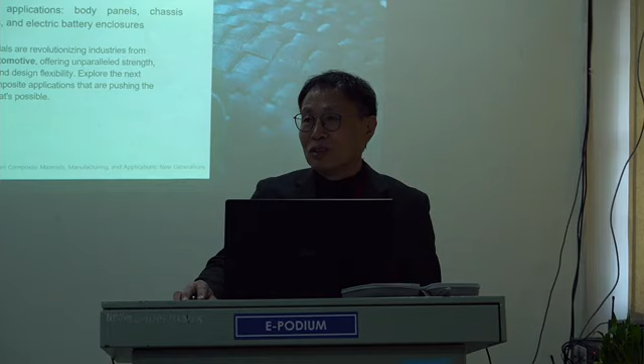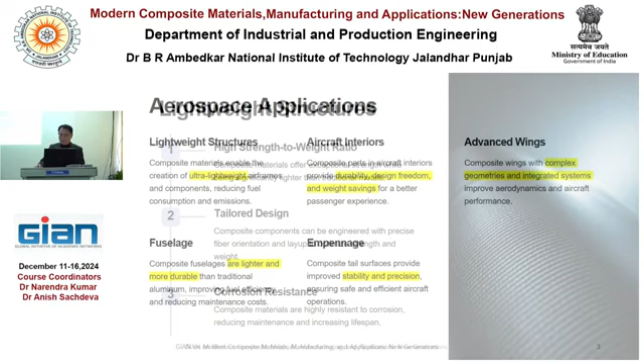And in order to have the best design satisfaction, we can design its anisotropy as we wish. So we can remove stiffening along the directions where we don't want high stiffness or high strength. So those three different advantages are basic keywords for all kinds of composite materials.

So it can be summarized like this: offering unparalleled strength, weight saving, and design flexibility. It's based on those three characteristics. So here we'll explore next generation composite applications.

We start from aerospace application because it is usually the first use of advanced technologies, not just in the material sector, but all very sophisticated, newly developed ones. If they are very reliable, then regardless of cost, new generation technologies can be used for aerospace. That's why advanced technologies can be found in aerospace applications first.

That doesn't mean automotive application is less technical or less advanced compared to aerospace. I think the extension to automotive application after aerospace is more meaningful, because in aerospace, mass production is not considered, since the number of required structures is limited. But in the automotive case, mass production must be engaged.

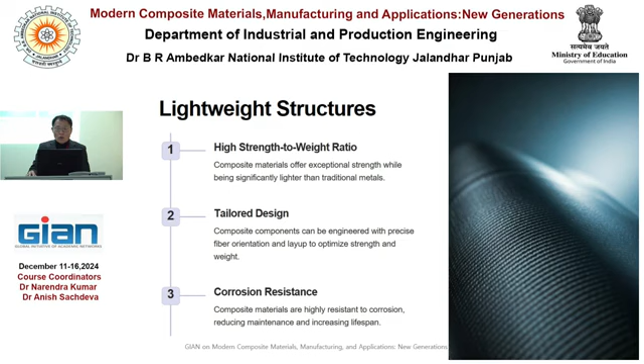This is a sample of composite materials currently used in aerospace application. This is secondary structure: seating, storage parts inside the cabin, and cabin interiors. All of those use composite materials these days.

And for advanced wings, the important points are aerodynamic efficiency, integrated system, and structural integrity. Of course the wing requires a complex optimized shape, so the manufacturing process must be considered to make this possible. And for the integrated system, composite wings allow seamless integration of control surfaces, sensors, and other systems.

And for structural integrity, it is very easy to embody strength and durability for the aircraft wing, improving safety and reliability.

Whereas for automotive application: composite material application for airplanes or space shuttles is a long story already, going back to the 1950s and mostly developed in the 1960s. But when it comes to automotives, it maybe just goes back to the 1990s.

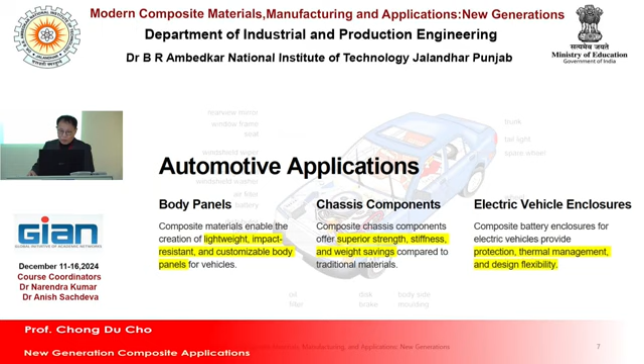And to take more space for battery cells, the case design shape must be flexible. About the body panel: lightweight, impact resistance, and customization. As we saw on the previous slide, those are important. Lightweight is a common emphasis. And impact resistance, because the body panel is installed on the outermost part of the automobile, so it must be impact resistant to external incoming objects. And customization is for the design issue.

Okay? And for chassis components, exceptional strength is required, and improved stiffness is required. Exceptional strength is needed to transfer the load very well. Improved stiffness, because large deformation is not wanted; the chassis should be very robust and strong. Okay? So improved stiffness is kind of the Young's modulus or something like that. So it's very important for chassis components.

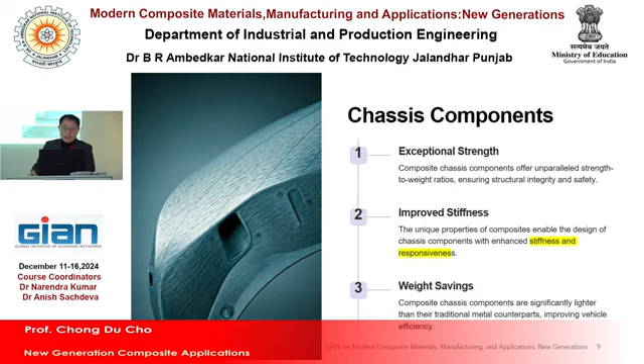Okay? And weight saving is also important, even for conventional vehicles, because the power per unit weight should be high. It is mandatory to be survivable on the market, because in that case fuel efficiency can be enjoyed. Right? And in the EV case, the EV battery enclosure is the most important issue. Right?

So EV battery: thermal management, structural integrity, and design flexibility. Three of those. The thermal management must have effective thermal insulation and cooling, the integrated cooling system made from the chosen composite materials, so that it can optimize battery performance inside. And the structural integrity issue is regarding exceptional strength and rigidity. So these highlighted points should be the basis to choose a composite system for automotive.

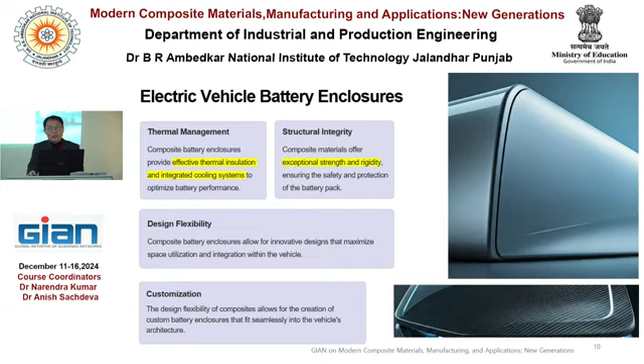Of course, all of the composites in the design pool for automotive must be possible, easy, or very effective for mass production. Without mass producibility, it cannot be considered for automotive use. That is a very different point from the aerospace application.

And this composite body panel improves aerodynamics and weight reduction. So this is the airplane, the head part: streamlined design, weight saving, corrosion resistance, and customization. Streamlined designs are molded into complex aerodynamic shapes. It's mandatorily needed, right? So that it can make very high speed traveling in the air.

And the overall weight should be very small, and of course the long-lasting performance is very important, because differently from automotives, the lifetime should be very long, longer than decades. But the automotive case is mostly within decades.

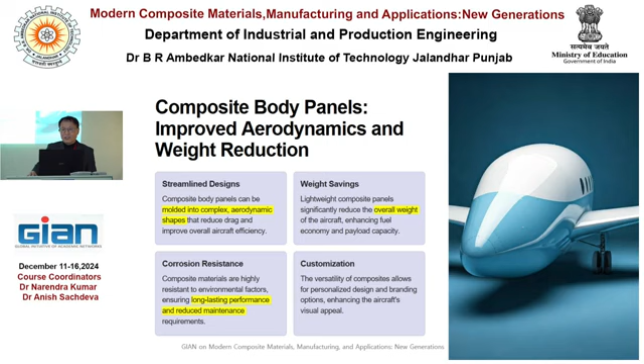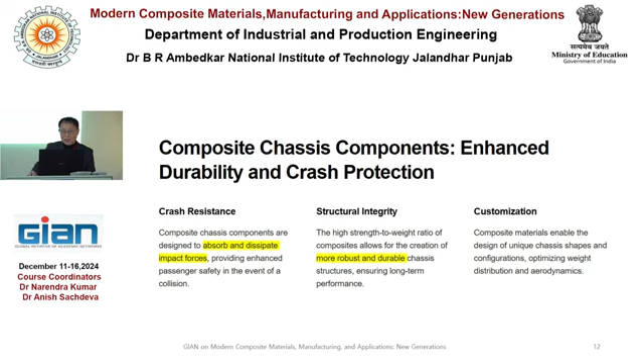And in the EV case, thermal management safety means thermal regulation, impact protection, and weight optimization. These three issues will be design points, and currently they are being used based on satisfying these points. Thermal regulation means a composite battery enclosure incorporates an advanced thermal management system, so as to maintain optimal operating temperature and prevent overheating.

Impact protection: the high strength of composites ensures the battery enclosure can withstand significant impact and collision, safeguarding the critical components. And weight optimization: lightweight composite material helps minimize the overall weight of the battery system.

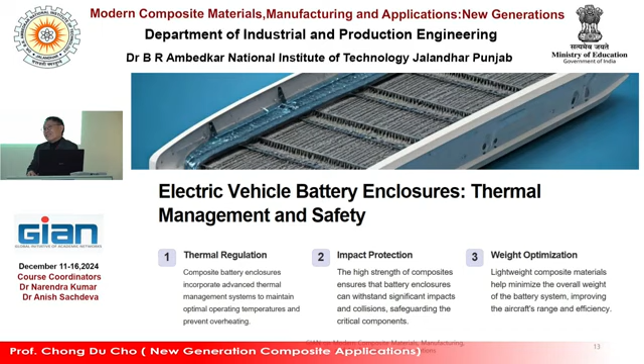So many students think maybe the electric vehicle is lighter than a traditional vehicle. They think like that, but it's the opposite, right? Opposite. Because the electric vehicle is much heavier than a traditional vehicle, it must have a larger contact area, tire, wheel, compared to conventional ones. It is not due to the body weight. It is due to the weight of the batteries.

Batteries are very, very heavy, and to cover up to 500 kilometers per full charge, the battery weight itself is already 300 kg, 400 kg, so they wanted to use aluminum alloy for the body to reduce overall weight. Okay? That's why electric vehicles have many aluminum alloy components and bodies compared to traditional ones. Traditional ones usually use high strength steel plate.

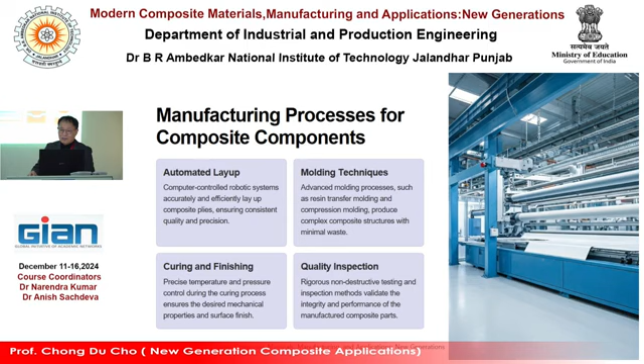And the manufacturing process for composite components is an automated ATL system. You heard it in the last lecture. And molding techniques, curing, finish, and quality inspection. For automotive use, this must be automated. Otherwise, mass production is not possible. So in this manufacturing process for automotive composites, injection molding is mostly used, compression molding is also used for large body structures, and RTM, and automated fiber placement, AFP, automatic machines. Those are already developed and can be found on the market.

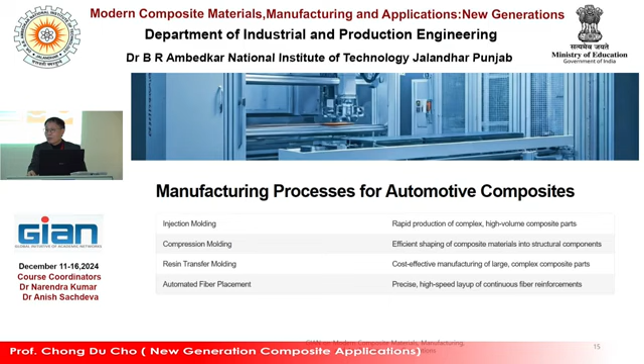But in the last lecture, maybe I did not talk about compression molding. Compression molding is a very simple one, so I just added one more slide here for manufacturing techniques for composite materials. This compression is like the conventional press compression machine. It's the same. But in this case, it is not used for metal raw material. We are talking about a composite panel. The body must be heated before placing it between the compression molds.

So the curing oven, this is a heat schedule that's needed before pressing, because ambient temperature is not a good temperature for making a permanent shape change in a composite panel. So it must be heated using some heat schedule, and then it will be pressed into the final shape. That means in this case the matrix should be thermoplastic only. Only in that case can the compression molding method be used. So thermoplastic PMC plate will be used for this purpose.

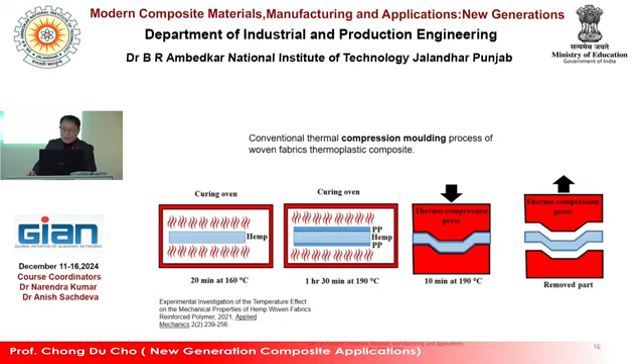And quality control and testing for composite structures: material testing, structural evaluation, and environment testing are engaged. Environment testing is needed for composite material parts. It's different from metal parts for conventional vehicle components, because the composite material has a matrix, the binding material. It's mostly plastic. Plastic absorbs humidity and is influenced by UV light, so its properties can degrade sooner or later. So it should be tested outside, and in some designated environments. It is a different issue compared to metal components.

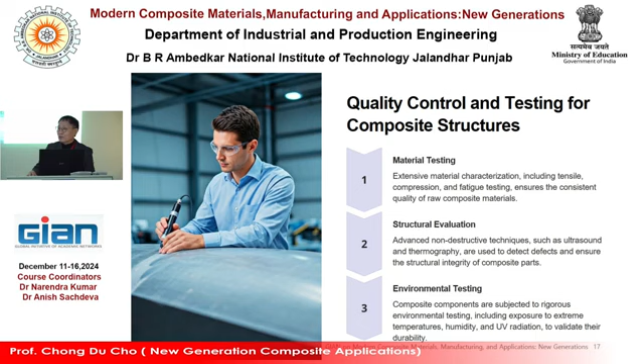And the maintenance and repair of composite aerospace parts. Inspection is visual, and NDT is usually needed. In the steel case, because it has very good ductility, its plastic behavior after deformation is guaranteed. So its toughness is well ensured already, and there is no issue about that. But in the composite material case, it can fracture, sometimes brittlely.

So damage distribution is very concerning. So non-destructive inspection technique is very, very important for composite material manufacturers. So all composite material manufacturers, for final use, must have very expensive NDT equipment. There is no other way. Visual inspection alone is primary; it is not sufficient for inspection.

And the damage distribution status must be checked before sending it out to the market. And the repair technique is a very complicated and important issue. Metal is very easy to repair because it can be reworked plastically, and it can be welded easily if needed. But with composite material, it is not possible. Welding is not possible.

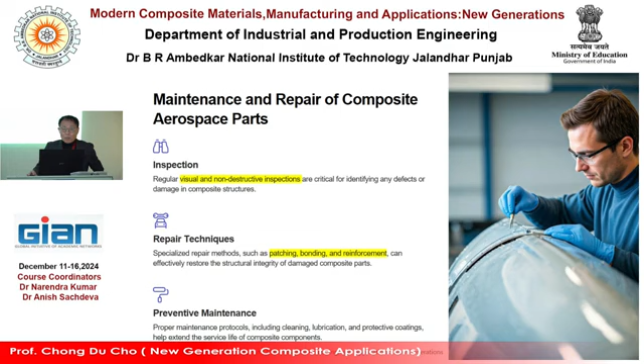And the future of composites in automotive industries: they consider increased adoption of composite materials, because they can guarantee a wide range of automotive functions. And innovative manufacturing, because mass production must be possible to use composite materials. Otherwise, without mass production capability, composite material cannot be used. But the performance of composite materials is already proven through aerospace industries.

So to get weight saving and higher strength, that means higher specific strength through composite materials, many automakers want to use composite components these days, but they must resolve how to make automated manufacturing techniques. Otherwise, mass production is not possible. So innovative manufacturing is practiced and developed every day for the application of composite material in automotives.

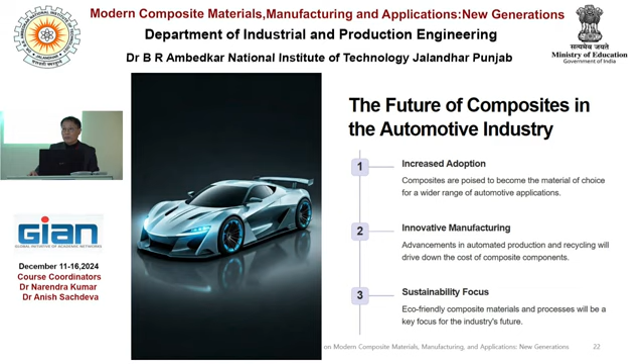And the sustainability focus. For metal, recycling is well established, but for composite materials it is not well established yet, but it is mandatorily required by authorities. So sustainability focus is a very important issue for composite material components. Otherwise, they will get a bad reputation against the eco-friendly environment. So those are considered by the industry.